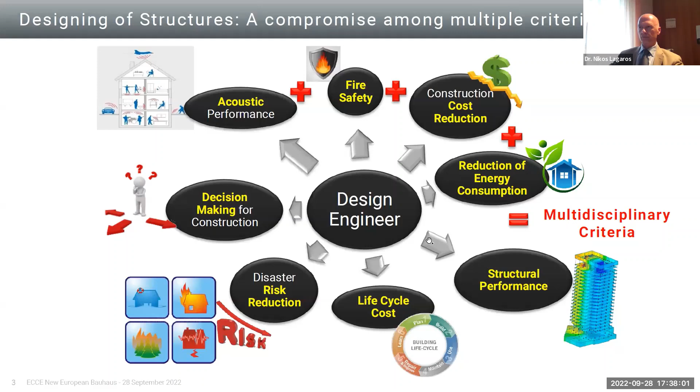The successful design and construction of the first light globe by Thomas Edison was the result of a long and effortful trial and error procedure. Although Edison had no basic knowledge of the way different materials resist electric current, today's engineers are commonly armed with significant knowledge concerning their fields. This enables them to generate good designs based on intuition before testing them.

Based on the advances in computer-aided engineering, such trial and error procedures rely on virtual prototyping. However, the potential of the virtual prototyping concept remains restricted by two factors: in every iteration, an engineer is needed to manually develop the computer model, while the success of this concept still depends on the restrictions of human intuition and skills.

The Latin word optimum means ideal, and optimus means the best. Therefore, to optimize refers to trying to bring something closer to its ultimate state. The history of optimization dates back several hundreds of years, during which remarkable progress has been made in developing new and more efficient methods.

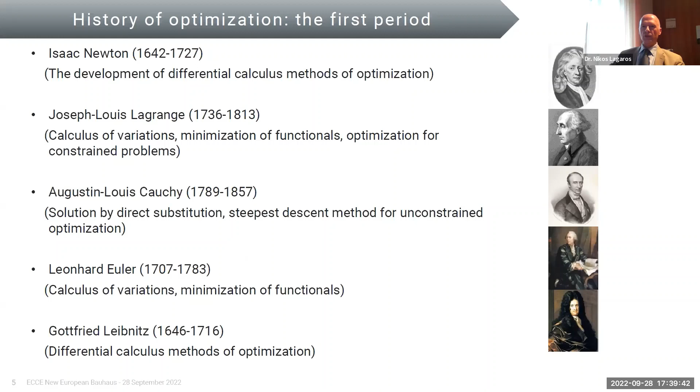The development of optimization algorithms can be traced back to the days of Kepler, Newton, Lagrange, and Cauchy, and more recently to Dantzig, Kuhn, and von Neumann.

The term structural optimization refers to the application of numerical optimization to the design process of structures like buildings, automotives, or aircrafts. The development of the finite element method was the reason for the dominance of computerized structural analysis design processes that allowed the application of finite element-based numerical optimization procedures to structures.

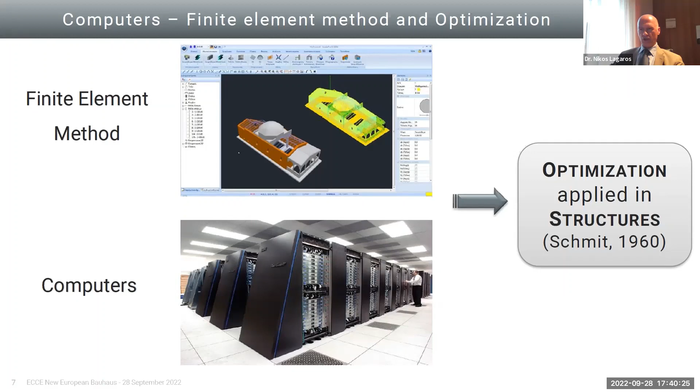Schmit, in his pioneering work, presented the first application where a simple three-bar truss structure was used to present the idea of structural synthesis.

Here we can see a typical optimization problem that can be mathematically expressed with this formula. There is a criterion, an objective function, to be optimized, either minimized or maximized, a function of unknowns, the design variables, subject to constraints. This problem is solved through an automated iterative process.

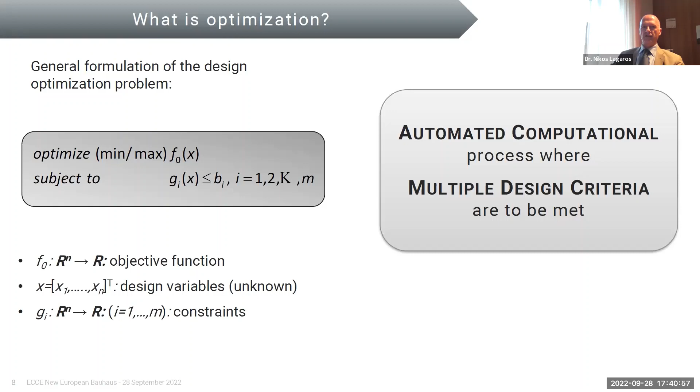Although in the early 60s, a large amount of excellent research studies has been published related to optimization-based structural engineering, where structural optimization was successfully applied to various problems, ranging from pre-stressed concrete beams, wind towers, to optimization-driven architectural design.

However, structural engineering practice falls short of adopting optimization-based design procedures. On the other hand, other engineering professions like mechanical and aerospace engineering implement optimization procedures in everyday professional practice.

For example, in the automotive industry, among other car manufacturers, the R&D department of Renault has developed standardized optimization procedures in the framework of various fields of simulations when developing a new car. You see here a car and how the initial design through an optimization process leads to the optimized design.

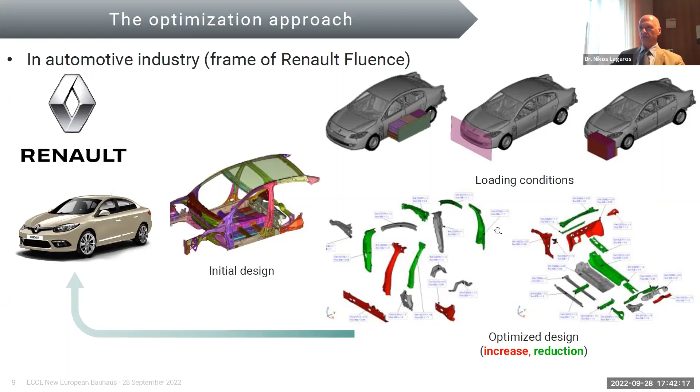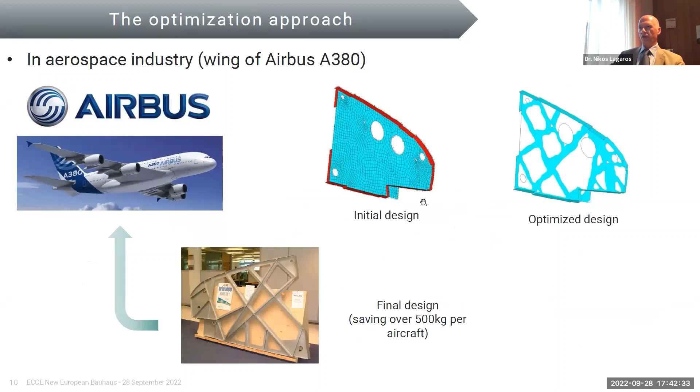Additionally, in the aeronautic industry, Airbus adopted an optimization-based procedure for designing the wing of aircraft A380. This is part of the wing that was designed through such a process.

Generally speaking, there are three classes of structural optimization problems: sizing, shape, and topology. In sizing optimization problems, the aim is usually to minimize the weight of the structure under certain behavioral constraints, as suggested by the design codes. The design variables, the unknowns, are frequently chosen to be dimensions of the cross-sections of the structural elements.

More recently, structural optimization research focused on changing the shape and topology of the structural system. In structural shape optimization problems, also associated with the term parametric design, the aim is to improve the performance of the structure by modifying its shape.

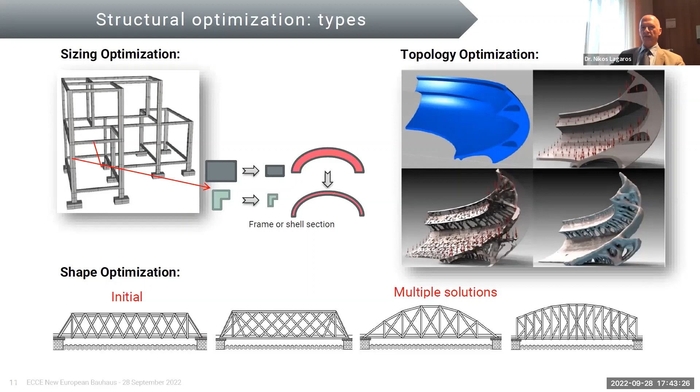So the question is, why not the construction industry?

Engineers' main objective is to design efficient structures that should be as economic and eco-friendly as possible, nevertheless strong enough to resist the foremost demanding operational requirements arising from their service life. The typical trial and error procedure that Edison used is not appropriate to derive economical and sustainable designs, also satisfying the safety criteria. On the other hand, the main objective of structural design optimization is to efficiently handle such problems.

However, the gap between the inherent value of structural optimization technology and the ability to be adopted by the construction industry still remains. This can possibly be justified due to the absence of specialized software for performing computerized design optimization studies in civil engineering.

Another reason is design engineers might be skeptical about the safety of optimized structural designs, while they might not identify a direct personal benefit from the use of such technology.

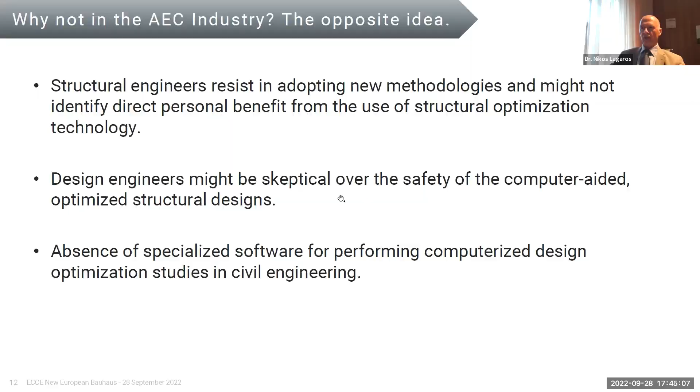However, the motivation to integrate optimization technology into the everyday practice of the construction industry, I believe, still exists. The material requirements for buildings currently represent one of the greatest resource use challenges. Even though this consumption does not always manifest itself in a direct and observable problem, issues like biodiversity loss, climate change, and soil erosion are linked to the extensive material use.

In Europe, more than 30 to 50% of the total material use goes to housing. The building sector is the highest contributor to global greenhouse gas emissions, 30% of the total, while it also consumes almost 40% of global energy, 25% of global water, 40% of global resources, while the construction industry is expected to expand by 85% worldwide in 2030.

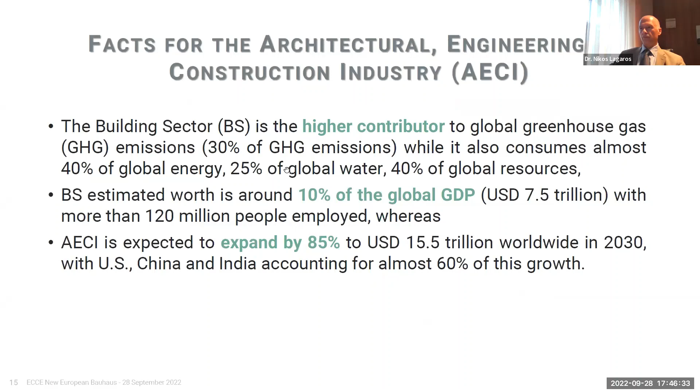The problem of extensive material use is expected to get worse, among others due to China's booming construction industry, a growing population, as well as the rapid growth in purchasing power in emerging economies and developing countries. This means that the global building floor area is expected to double by 2050, further increasing the energy demand and the greenhouse gas emissions related to construction.

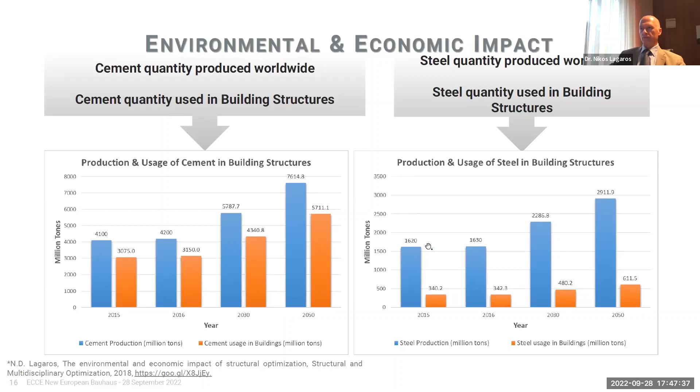In order to present the influence of design optimization procedures in the construction industry and thus the environmental benefit that we can get, we can use some scenarios. Assume that via a design optimization procedure, an average reduction on material requirements is up to 5%, while a global 0.5% of the construction industry market adopts such techniques during the design procedure.

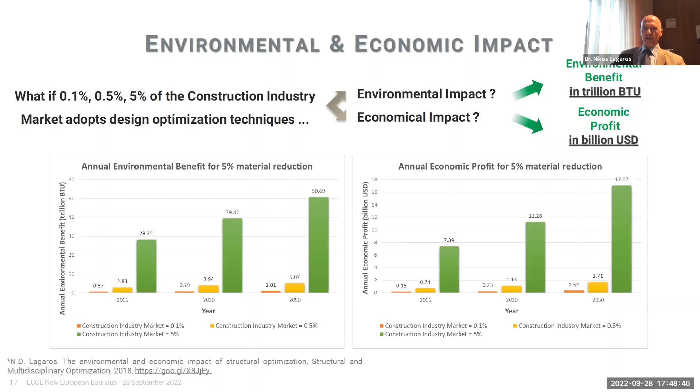You see in this slide the benefits that are derived through the implementation of such procedures in terms of environmental and economic impact. So, the larger the percentage of the construction market that adopts such design procedures, the more the benefit becomes.

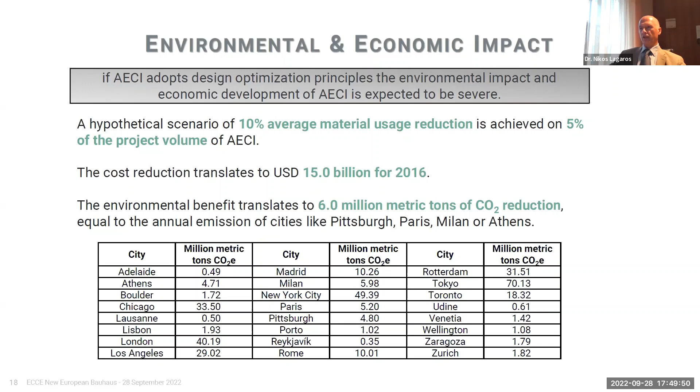Given the benefit observed throughout the application of the optimization procedure into the construction industry, the question is how such technology can be integrated into the real world construction industry practice.

So far, several technical offices offer value engineering services, but they basically rely on the outcome of multiple trials, the trial and error procedure, and on the experience of the engineers. Such a procedure is extremely time consuming and demands additional human resources.

Also in the past, there have been unsuccessful attempts by software companies to incorporate optimization in their products addressed for civil engineers. However, major problems arose: failing to deliver constructable designs, tools that were not easy to use, absent user-friendly interfaces, and the achievement was of minor importance. On the other hand, there are some computer-aided structural optimization services that can be used to efficiently deliver the specific problem.

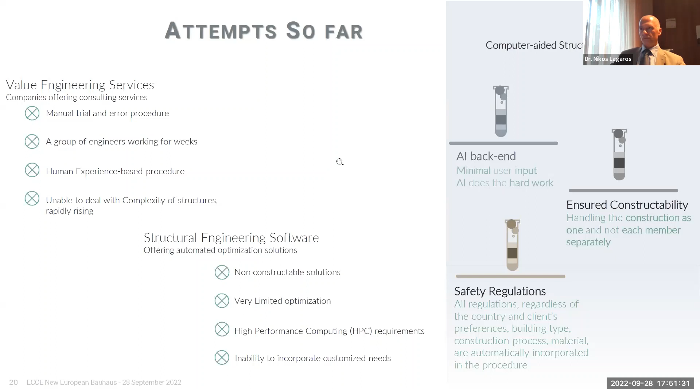Worth mentioning that there is a major difference between the construction industry and the car or aerospace industry. The subject manufactured, whether it is a car or an aircraft, is produced in multiple copies. On the contrary, every construction project is unique regarding its structural system, its foundation, and any other parameter.

Furthermore, it is worth mentioning that the engineer during a design project, the civil engineer, is free to introduce additional design checks in conjunction with those imposed by the design codes. So he performs additional tests using tools other than those of the basic analysis design software that he's using. For example, he might use Excel sheets or MATLAB or Python scripts. He might use two or three analysis design software programs in order to assess the structural performance of his design. He might disregard, if needed, the results of finite elements that do not play a key role in his model.

So this way that the civil engineer, the design engineer, works, are some additional reasons why specialized software might fail. On the other hand, computer-aided structural optimization services addressing a specific problem for real-world cases are applied through the synergy of state-of-the-art technologies like high-performance computing, artificial intelligence, and the knowledge and background of structural optimization.

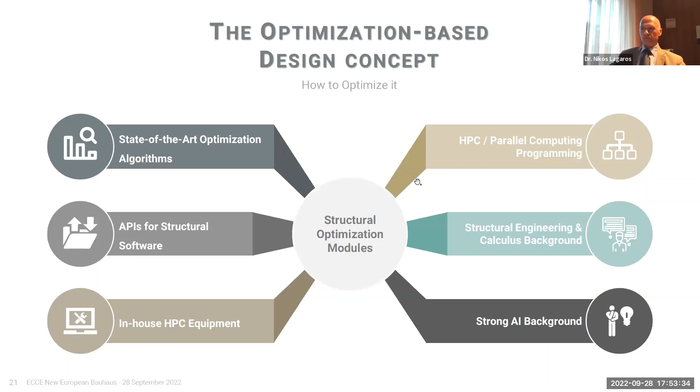The workflow of such a process should be carried out through some steps. First, overview the original model provided by the design engineer, formulate the problem, parameters, restrictions, criteria, and the whole process, implement special demands by the civil engineer and the design engineer, then execute the optimization process for calibrating the problem, and deliver the optimized structural design at the technical study.

This is how such a process can be applied. Such an automated value engineering service will provide guaranteed constructability, incorporation of additional design code safety demands, increase productivity, and mitigation of possible mistakes through an automated process. It provides exploitation of the advanced features of BIM.

Also, the digitization of the information derived through the construction designs will be taken into account. It can be adapted to cover all specific needs of a project, considering all personalized requirements of the design engineer, while it will exploit the results of any technical software that is used.

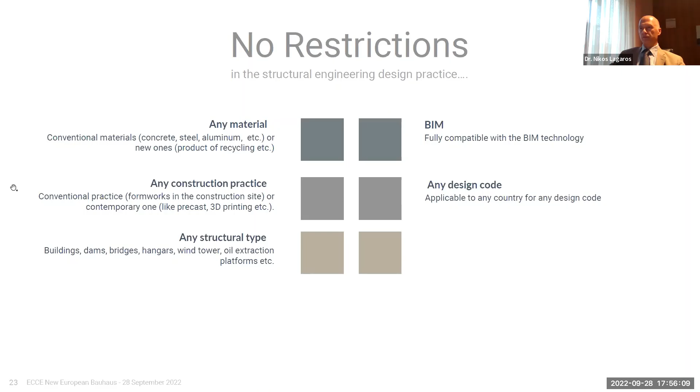As a conclusion, I will try to show some results from the industry that will show the benefits that can come from such a process. Depending on the process and what is allowed by the design engineers, optimization can be applied either on the cross-sections of the structural elements, on the structural system, on the material used, on the structural elements, on the non-structural elements of the construction, or a combination of those.

Here we can see a high-rise building office built in India, where through such a process a reduction of almost 7% was achieved in material demands. You see the greenhouse emissions compared to the emissions that Athens emits annually.

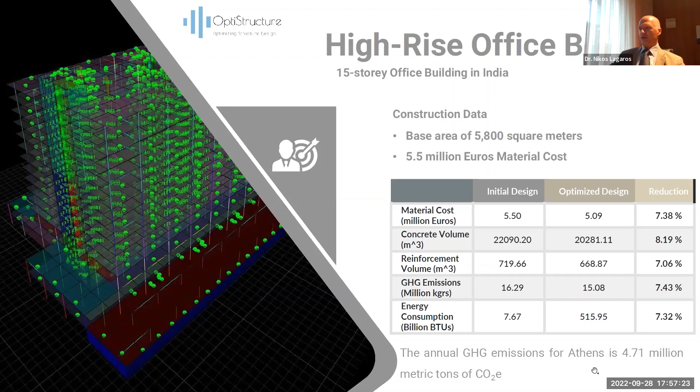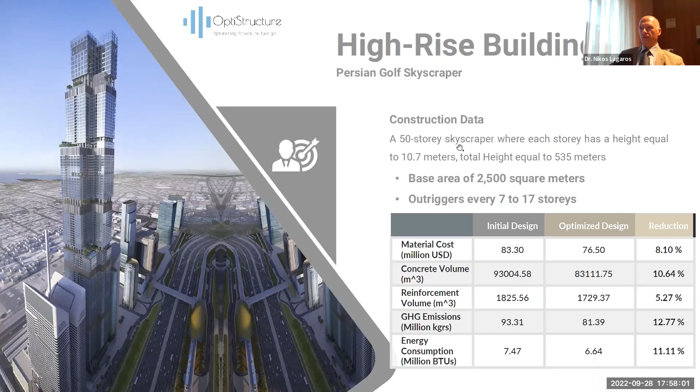And here is another building, a skyscraper in the Persian Gulf area, where a reduction of 8% was achieved, and you see the corresponding reduction in terms of greenhouse gas emissions and energy consumption. You realize how optimization, applied mathematics, and engineering can contribute to sustainable design towards a sustainable new era for the construction industry.

Thank you very much for your attention.

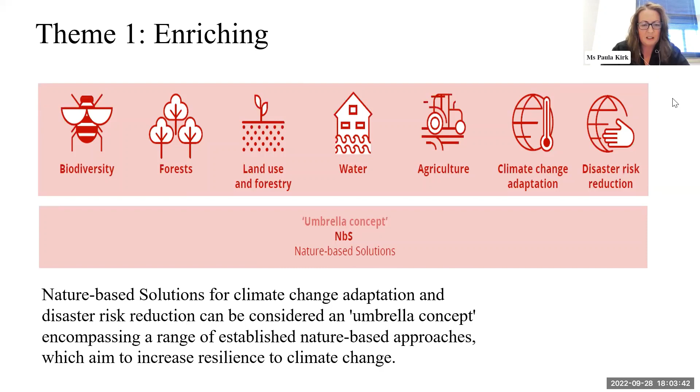Can we incorporate biodiversity? Is there a connection through to forests, land use, forestry, water, agriculture, climate change adaptation, and disaster risk reduction? How do these concepts potentially come together under that umbrella of nature-based solutions, and how can we encompass those in terms of design to make sure we are designing for resilience to the climate changes we're seeing?

One example I wanted to highlight is work we've done with a group called C40, a global organization of just under 100 city mayors focused on taking action to address climate change. Working with them, we've produced - and a lot of these documents are available on the website if anyone wants to download and view them -

a guide called Green and Thriving Neighbourhoods. This is a model for low carbon urban development, very much human in scale, thriving from an economic perspective and inclusive for our future. The guidebook is for cities, national governments, private sector, developers, as well as residents and communities. It sets out a framework of approaches for how they can develop net zero, people-centered neighborhoods, showcasing the future we want to see going forward.

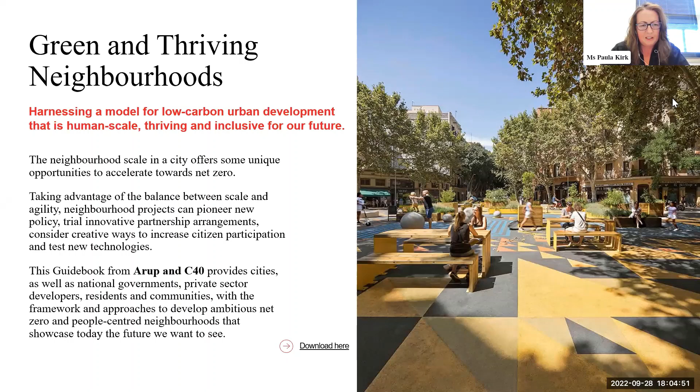Another example is work underway with the European Bank for Reconstruction and Development. They are funding a series of green city action plans across the region. We've been working with them for the last 5 years across a number of cities, and the one to touch on today is in Tirana.

The EBRD have got some very ambitious targets around their investments supporting carbon reduction in projects. They also have a requirement that all of their invested projects are Paris aligned - aligned to the Paris Agreement. So being able to demonstrate and illustrate the sustainability components of what those projects can achieve is a core requirement to access the funding.

One of the projects we've worked on is the Tirana Orbital Forest. This addresses the need to green the city of Tirana in response to issues they're experiencing, such as poor air quality, flooding, and excess urban heat. The proposal we've been working on with them is around the planting of a new orbital forest the whole way around the city, investing in green infrastructure to respond to all of those challenges.

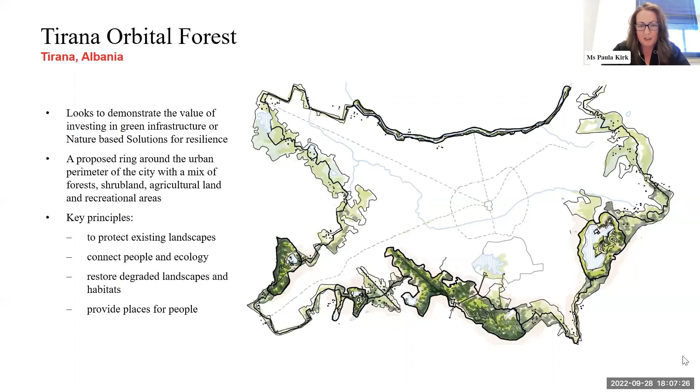This is a clear example of a nature-based solution for resilience. It's a proposed ring around the urban perimeter of the city, a mix of forest, shrubland, agricultural land, and recreational areas, protecting existing landscapes and connecting people to ecology. This touches on inclusivity, looking to restore degraded landscapes and habitats, and the need for regenerative design to move beyond just net zero, providing places for people as well, bringing together sustainability and inclusivity.

Another example is the New Island and metro connection in Copenhagen, a proposal to build a new island for 35,000 people. This is also to protect the city from rising sea levels, with a new metro connection requiring new infrastructure to connect with the existing networks and infrastructure within the city.

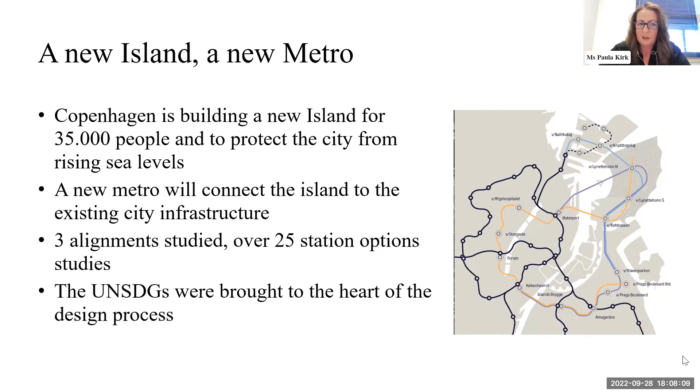Where we started with this project was to bring the UN SDGs, the Sustainable Development Goals, into the heart of the design process, thinking about that as the core principle and driver for our design thinking from the very beginning. We started to think about carbon - how can we actually design with carbon in mind? When we incorporated this into our digital workflows, it made the engineers think differently about material use.

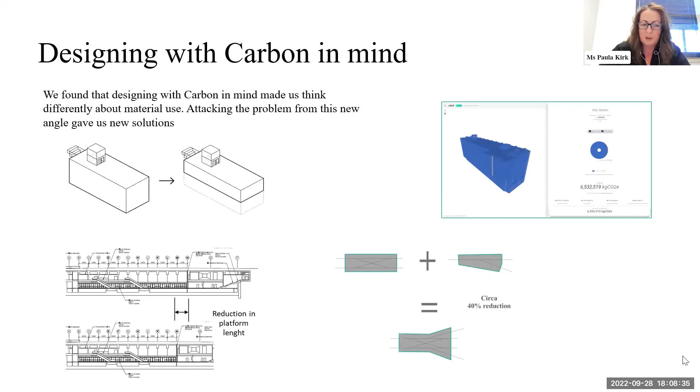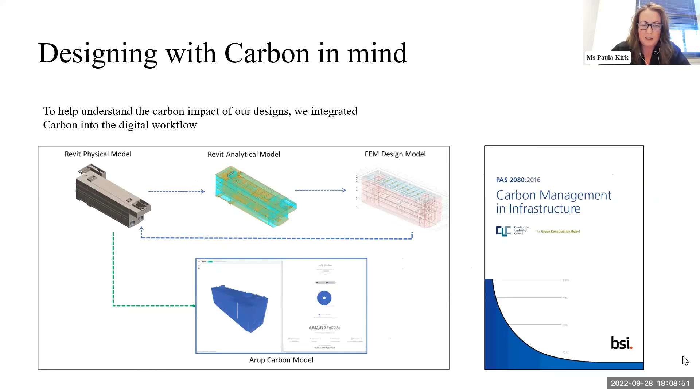This helped us come up with new solutions about what materials and components to use and how to use them. Some of the guidance we used for this is in the Carbon Management in Infrastructure standard, PAS 2080, which you may be familiar with, using a lot of that to guide and help with the analytical models.

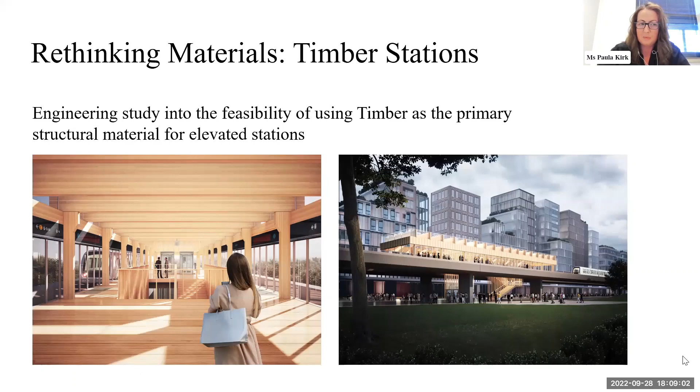What we started to look at was engineering and rethinking the materials around timber - timber stations, using timber as a primary structural material for these elevated stations. We looked at that from the carbon perspective and identified we could achieve up to 50% savings in embodied carbon compared to the standard concrete station.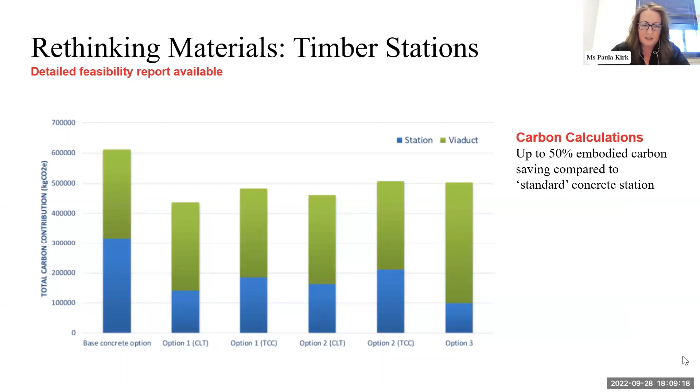We also looked at timber materials for the viaducts, and what that could mean in terms of structural system capacities, durability, deflection limitations, and various issues around fire safety. There were some very interesting conversations with the fire engineers about making sure the materials properly meet codes and that there are no unintended consequences in terms of fire risk.

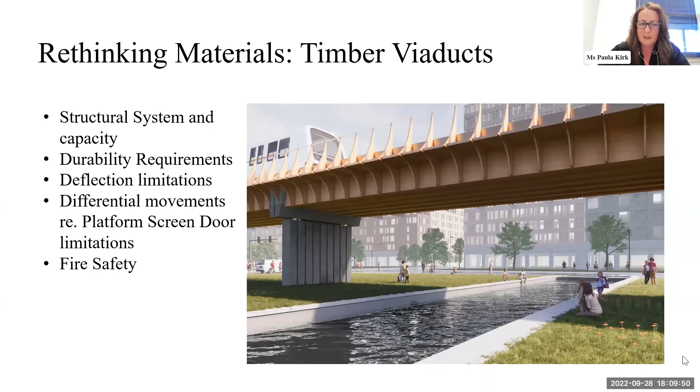Carbon calculations for the viaducts also clearly identified that we could achieve an additional 50% embodied carbon savings compared to standard concrete.

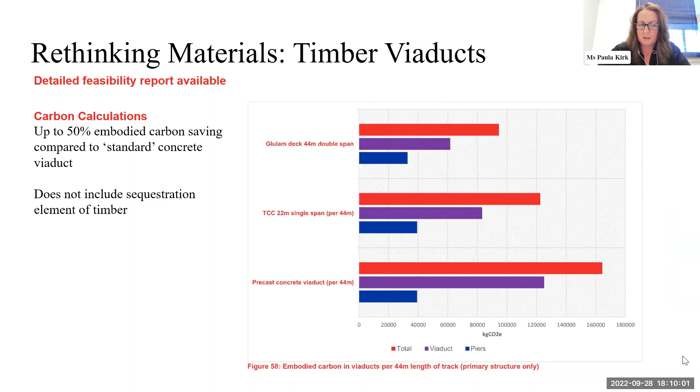Another interesting project we've worked on, which I think is fantastic going forward, is the Ørsted offshore wind farm in the North Sea. This has been developed with the government in Denmark, who are looking to build the world's first artificial island to harvest sustainable wind energy potential in the North Sea. To do this, the wind farm would require a new island to be built. Arup have been working with them, again thinking about sustainability from the outset.

We asked the question: if we're going to build a new structure in the sea, how do we take account of broad sustainability issues? Going back to biodiversity and looking at nature components and climate risk, we scoped out the systems that could leverage the island's infrastructure design for different habitats - how this could support biodiversity, and how that could happen at different levels that the island would go to. We looked at all those different options in terms of engineering.

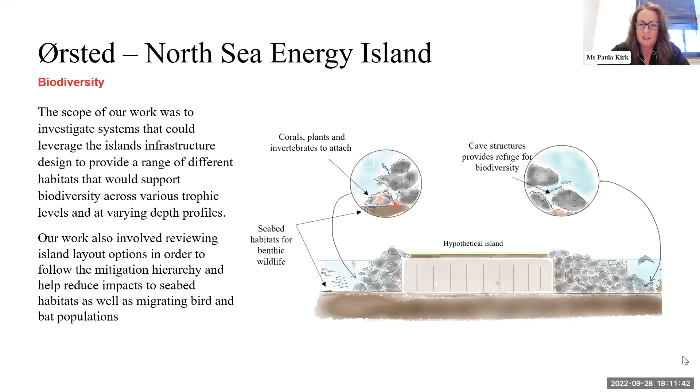We looked at the materials we could use, cave structures for refuge and biodiversity, what type of corals and plants to attach to those to ensure they had the stability needed, and how to make these safe for migrating birds and, apparently, the local bat populations as well - that diversity of integrated systems thinking to come up with something quite innovative and practical.

Something we showcased at COP26 last year as part of the Build Better Now exhibition was a circular timber bridge design. This looks at the idea of different materials, incorporating circular economy principles and thinking into the design, and looking at renewable materials. How could that be built? What would the modular components of that be? And how can we incorporate reuse into those as well?

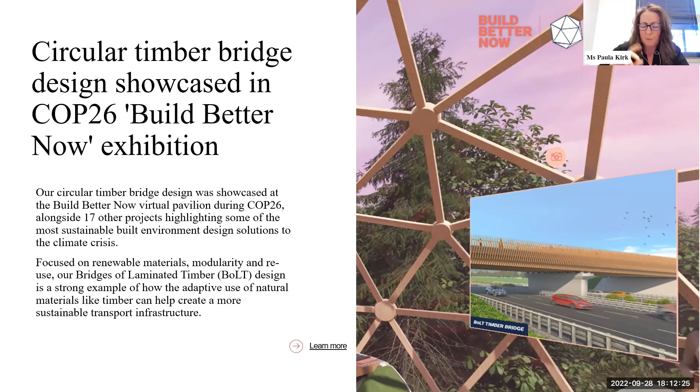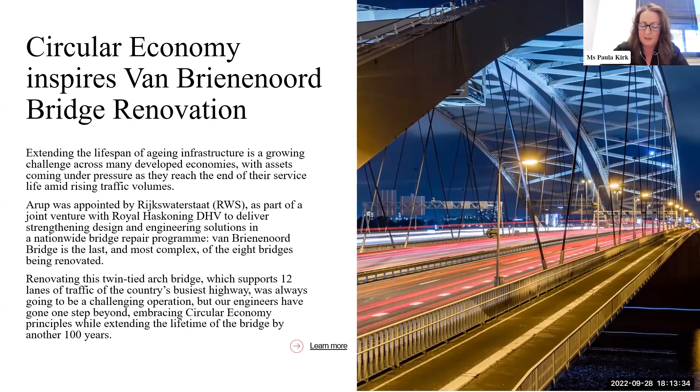So we worked with Rijkswaterstaat as part of a joint venture, and we looked at strengthening the design and engineering solutions for the National Bridge Repair Programme. This is very much about going one step further to incorporate and embrace circular economy principles into any of the design and upgrades, as well as extending the lifetime of those bridges by another 100 years. So that reduces the need for any new build, significantly reduces the additional embodied carbon and additional resource use that would come from it. So again, touching very much on that sustainability perspective.

And the third theme that we have is around inclusion. This is very much at the heart of what Arup believes, that co-creation is a process for enduring and systematic change, and that if we can create that properly in communities, it will result in improved quality of life for individuals. So how do we incorporate that into projects? Again, interesting to see stakeholder consultation high up on the list of what engineers perceive they have strength in already. So we're definitely seeing that across our engineers as well.

We worked on a really nice project in Ankara in Turkey, which was about healthy streets. This was about designing a city for everyone, making sure that sustainability and inclusion were at the heart of this redesign of downtown Ankara.

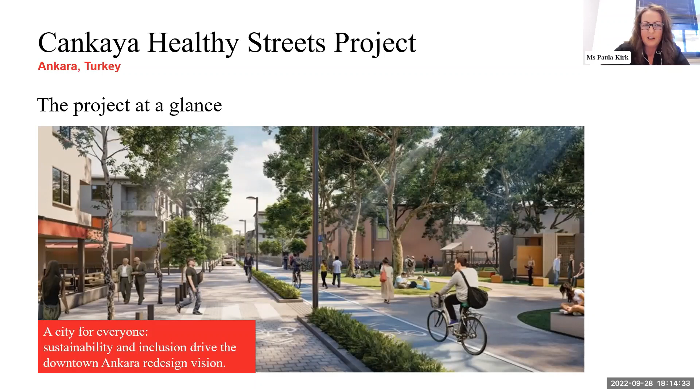How did we do this? There were those extensive, very extensive consultation and engagement - I think there were over 400 workshops held with different residents groups, community groups, local businesses. This was all done over the last 2 years. A lot of these were done in person, and a huge amount were done online as well.

And this collaboration definitely led to quite different outcomes. There was a huge amount that we learned from the process in terms of what the local communities needed and wanted. And the sense of ownership that has come from this project at the end has been absolutely fantastic. So again, using the UN SDGs as the initial starting point for how to design and how to start thinking about this design. Gender equality and social inclusion was another key issue that we were incorporating right from the outset of this as well.

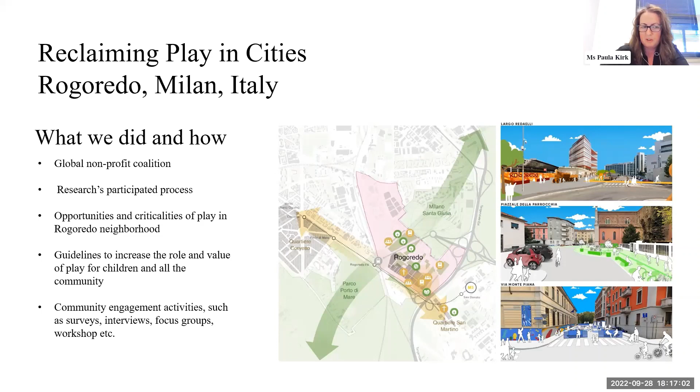Some of the other work as well around the participatory processes of how that engagement happens - how do you identify what's needed for a neighborhood and set that essentially as your design brief for how to redesign infrastructure, roads, streets, landscape and the urban realm within a neighborhood, within a city. So community engagement as part of that process was a key component to set things off. And again, understanding the guidelines that were prepared to increase the role and value of play for children in the community, really making sure inclusivity was a core component of that whole design.

And finally, just to touch on a report we produced recently with Transport Infrastructure Ireland, based here in Dublin. This one was quite interesting - it was called Travelling in a Woman's Shoes. The report was commissioned to really bring to life the experiences, through real data and real life stories, about equal access to public infrastructure and understanding how we can create a more equitable travel experience.

This report, when it came out, there was mixed reaction to it, which again was quite interesting. But something that I learned a lot from, which I didn't expect to do. I thought as a woman, I understood what it meant to travel and to use public transport.

But it's like many things, when you actually shine a spotlight on this, you think about things such as the lighting around bus stops and how people actually access bus stops or train stations, and how that can put off certain people from using them. So again, a very interesting study with very useful insights.

In terms of ensuring that we can design for a very equitable and a very fair society. So that's it from me. Again, like I said, these reports and the others are available on the website if you did want to find out any more or to learn more about these. Thank you.